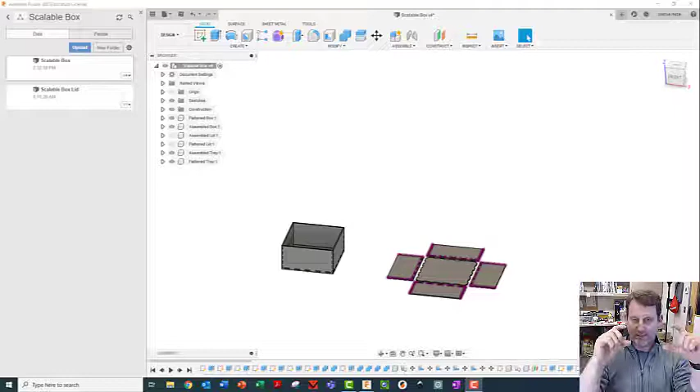We've already done some work. We figured out and made this measured drawing of the size of our tray and all the little compartments and what they're going to be used for. We've also looked at the depth of the box and the depth of the lid and figured out how deep we can make our tray.

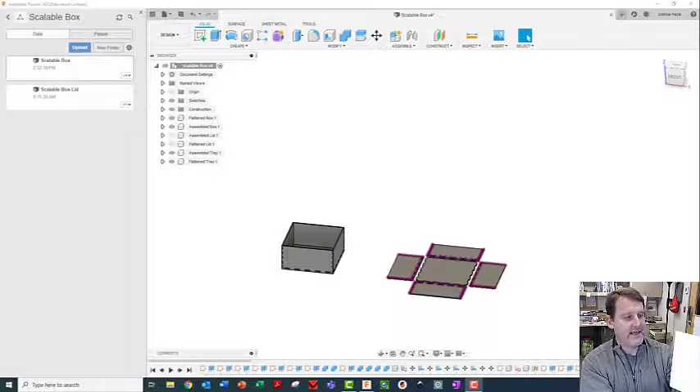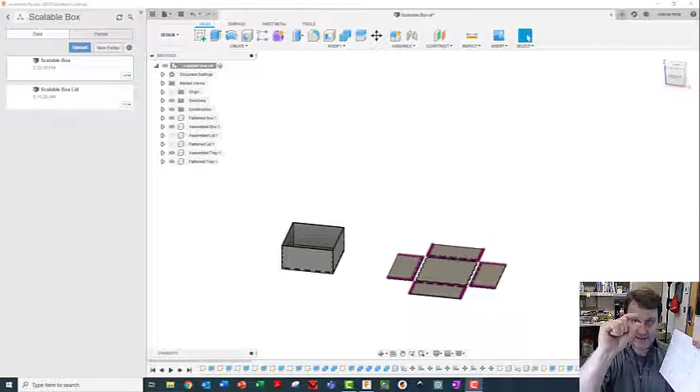One of the things you have to be careful about when making the tray is that the smaller the compartments get, the more shallow the tray needs to be. If you've got something only a few centimeters wide in both directions and you make it 5 centimeters deep, you won't be able to get your fingers down to the bottom to grab anything, and you'll be very frustrated by that tray. So as your boxes get smaller, the wall of the tray has to get less deep, so you're still able to grab stuff at the bottom.

All right, so here we go, let's do it. I'm going to open up my Fusion 360 and open up the scalable box file. You can see I have it open here, and what I'm going to do is build the tray in this file.

You don't have to do it this way. The reason I'm doing this is that I think it's kind of fun to have them all in one place, and I can reuse my parameters from before for scaling things later. But you can start with a brand new file, you just have to add the parameters.

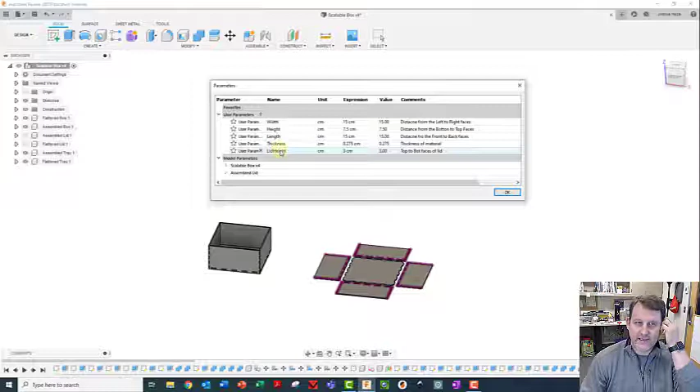So let's take a look at those real quick. Right now we have width, height, and length parameters, a thickness parameter, and I added this one for lid height. You're going to need this lid height parameter—mine was 3 centimeters, which is the height of the side walls of my lid.

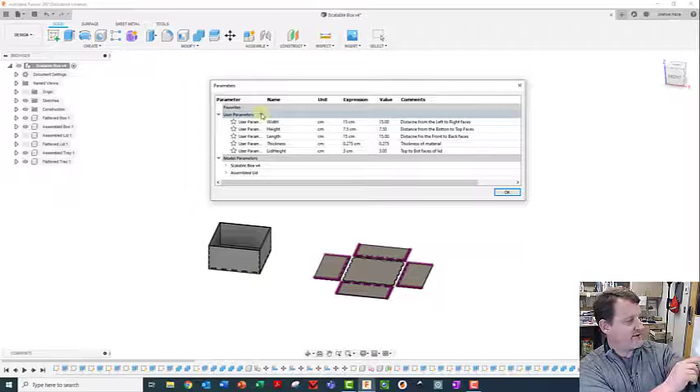From here, what I'm going to do is add some more parameters. We know that the width of our tray is going to be width minus 2 times the thickness minus 0.15 centimeters. Now, we can type that in every time, or we can make a new parameter.

Watch this—I'm going to call this one 'lid width'. I can't use spaces up here, so that's fine to leave it like that. This one's going to be just what I want: width—normal width, not lid width—minus 2 times the thickness, minus 0.15. So now I've defined lid width as a combination of width, thickness, and this number.

So if sometime later I want to change things around and make it wider or narrower, I can easily come and do that right here, and it'll ripple through everything.

So this is the left to right face of the lid, the distance from the left to right face. Maybe I'll put 'from' in here—so, from left to right face of the lid, and that's our width.

We'll do the same thing with length. So, new parameter, we're going to call this lid length. We're going to enter this one as length minus 2 times the thickness minus... nope, that's wrong, minus 0.15 centimeters. Notice it's done the math for me real quick—based on what I put in, it's going to make it 14.3.

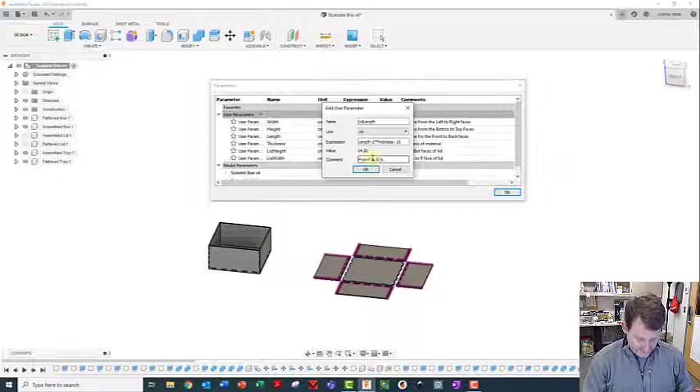And then this one is from front to back faces of the lid. Click OK.

And top to bottom, so the lid height was top to bottom of faces, left to right faces. Okay, these both match up, so I know for mine that they're correct. Yours will probably be different because you probably have a different length than a width. If you don't, if you're the same, then yours will be the same as well, but different numbers.

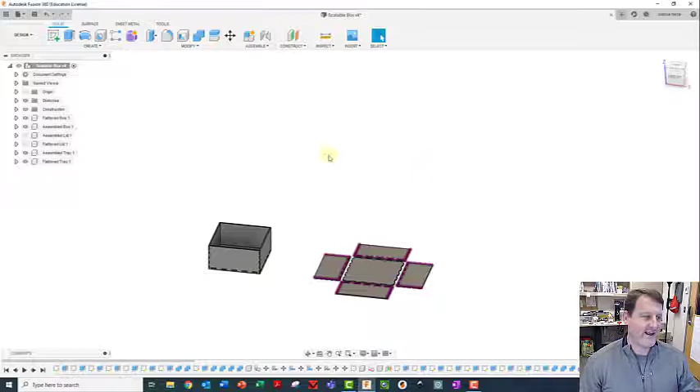All right, so that's it for our parameters. I think if we need more, we'll add more. So what I've done already, I went back and redesigned the lid, and added it to this file. I put the lid just above this one, and the flattened one just above that one. So that was kind of cool, I thought that'd be fun.

And I thought I'd maybe put the tray right in here. You don't need to put the lid in your file. In fact, you might be in a totally blank file, having just entered those things. If you do start with a blank file, here's what I want you to do though.

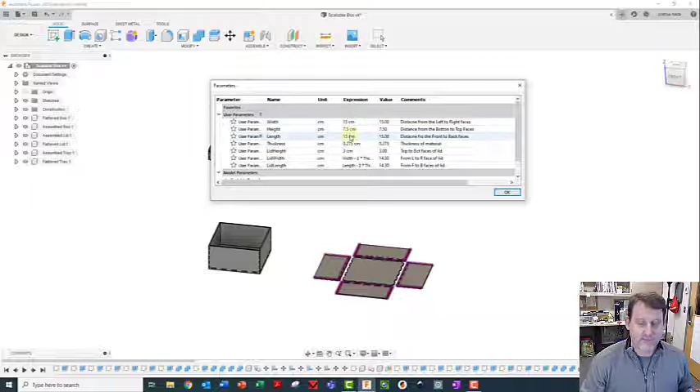I want you to create a width, height, length, and thickness parameter, and make it the width of your box, the height of your box, the length of your box, and then create these based on that number. That way when you come through here, you don't have to try and figure out how to fix things, you just make this the same 3 numbers that are in the box. And then it'll make a lid the right size, it'll ripple through there. Okay, so let me show you some stuff.

There's some confusing things going on here. I've made a whole bunch of components. Notice I've got an assembled box and a flattened box component. I've got an assembled lid and a flattened lid component. And I've got an assembled tray and flattened tray.

You don't have these two, you need to make these two. Don't worry about not having the lid ones. And even if you don't have both box ones, it doesn't matter. All you need to do is make sure you make these 2 components.

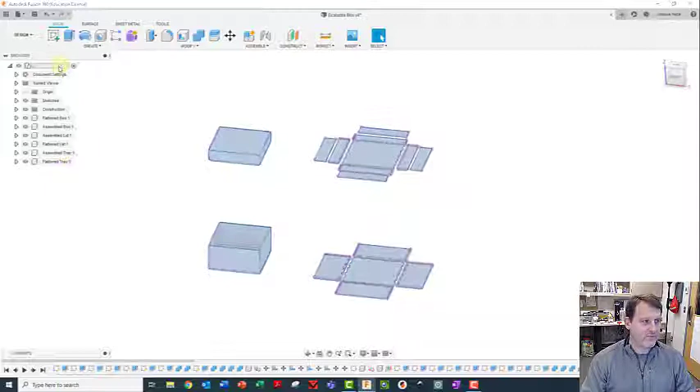So right click on scalable box, do new component, and call the first one assembled tray. Do it again, new component, and call it flattened tray.

Now notice how everything is like this dark gray color. That's because I have the top one, the scalable box, everything is the active component. That means everything can be messed with right now. Well, that's not always a good thing.

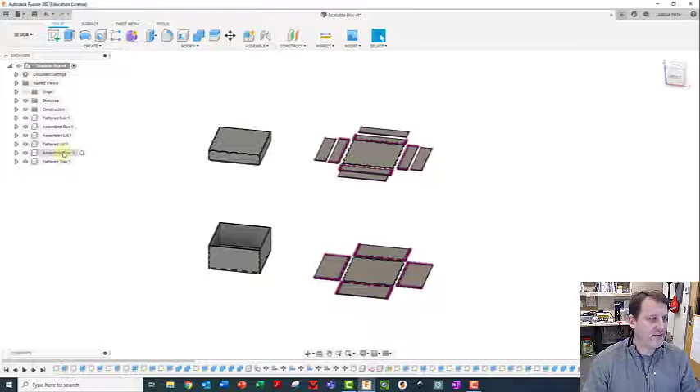In fact, when you have this on, all the sketches that you make are going to go into this main sketch folder. And I actually want my tray sketches to go into this assembled tray folder. So what I'm going to do is make assembled tray the active component. And when you do that, anything that's not active, which is everything else, is going to turn to this clear color so you know which ones are active and which ones aren't.

Right now, if I were to do something, it would not affect these other pieces. I can't edit them right now. I have to turn them on, or I can come up here and turn them all on and then affect all of them. Okay, go back to, I'm going to make assembled tray the active component, and I'm going to build the tray right here in between these two.

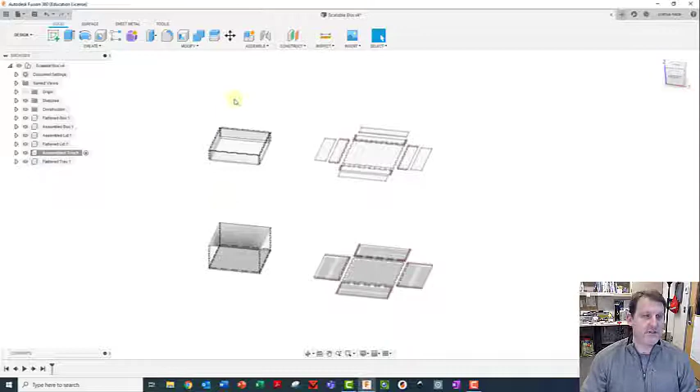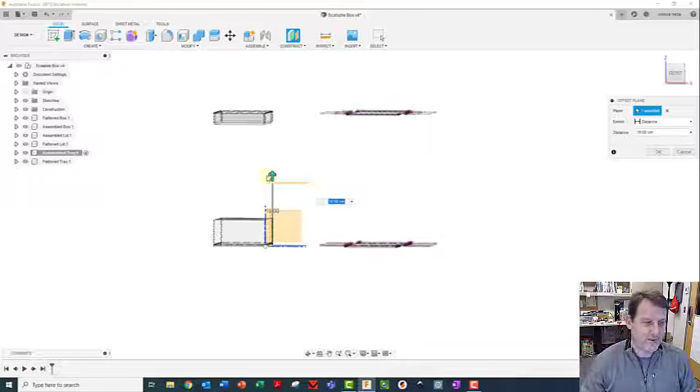So first thing I'm going to do is create a construction plane, offset plane. I'm going to offset it from this bottom plane here, and pull it up somewhere in between the lid and the box. And I'm going to build the tray from the bottom of the tray up, so I'm going to keep it a little bit probably lower towards the box. Yeah, about right there looks good. And I'm going to click OK.

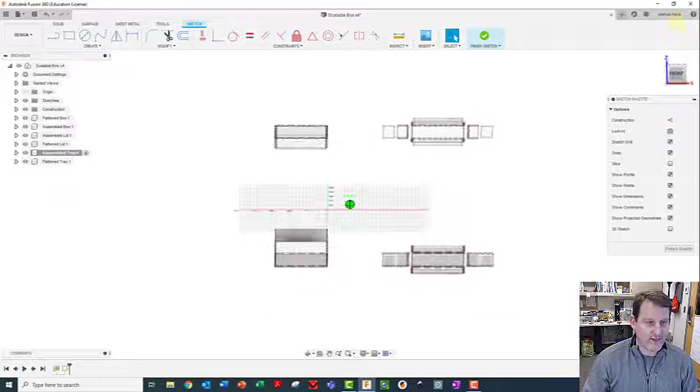Now I've got a plane to draw my tray on. So I'm going to come up here and click Create Sketch. I'm going to go right on that, and there's my sketch. Now, as you can tell, my sketch is actually below the top, it's down there, so I'm having to look through the lid.

I want to turn that lid off. So I'm going to come over here and do lid, turn the lids off. You probably don't even have that problem.

I am going to leave the box on, but I'm going to get the flattened box out because I don't want to be distracted by that. I want to leave the box on so I make sure I make it in the right quadrant. I'm going to make my tray over on this side somewhere. Okay, now what I'm going to do is just make a box.

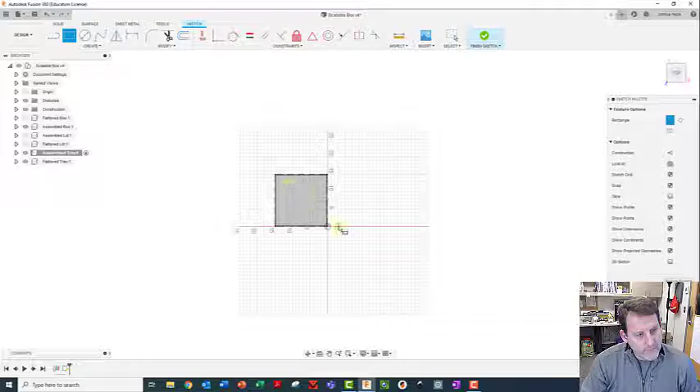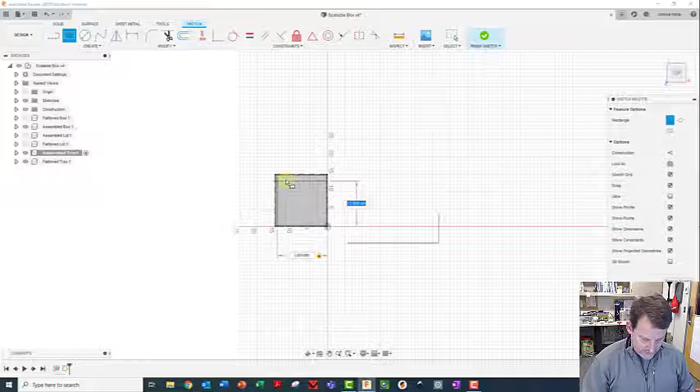I'm going to start on the quadrant. I paused for a second to think about where I wanted to make it. I'm going to make this the lid - the front is down on this face, so this direction is width and this direction is length for me. I'll call this lid width, enter, and the other one will be lid length - I can use the arrow key to go down or just keep typing until it gets to the right one. Then I'll hit enter, and that's the dimensions of my lid. Now that I've put it in the right place, I don't have to worry about that box anymore.

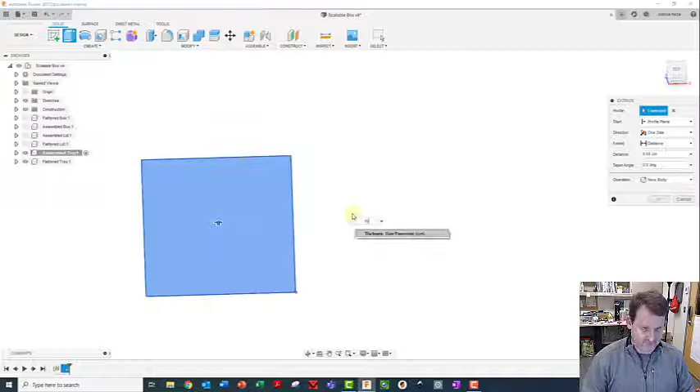So I'm going to hide the box and extrude this. I don't care which way it extrudes - thickness, I'm cool with that. Then I'll hit enter, and now I have the bottom of my box. That should be, if I've done everything correctly, in the bodies folder under assembled tray. And it is, so I'm going to call this the bottom tray. That's the bottom of the tray.

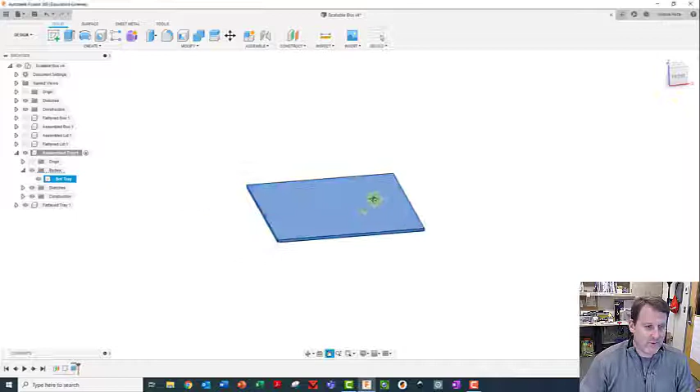Okay, now I'm ready to rock and roll. I'm going to start building all my walls, starting with my main wall going across from left to right. That's the way I want mine to be - you could do yours front to back, I'm going to do mine left to right. It doesn't matter, your choice. But I'm going to do the main wall first, which is halfway between these two walls.

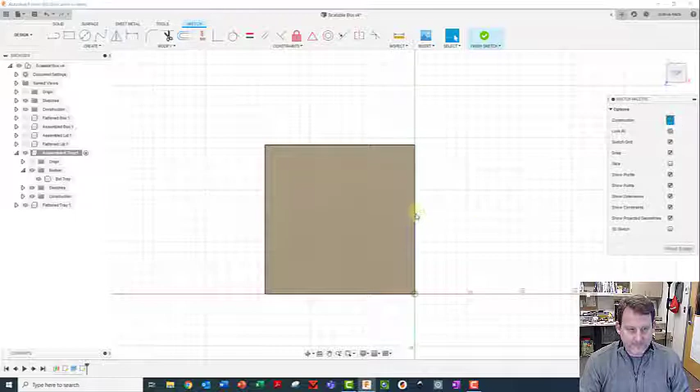So I'm going to come up here and get a construction line - construction, and then the line tool. I'm going to find the halfway point. Whoop, there it was - right there. I'm going to draw a construction line across. Awesome, that one's fixed in place. Then I'm going to draw another construction line down. I want to find the dead center of this, because what I want is for the wall of this box to be right on the middle.

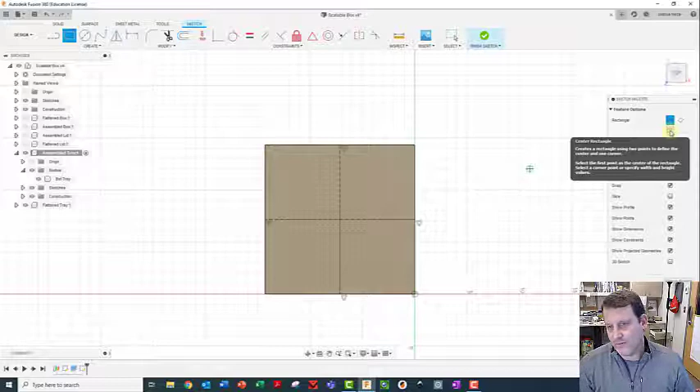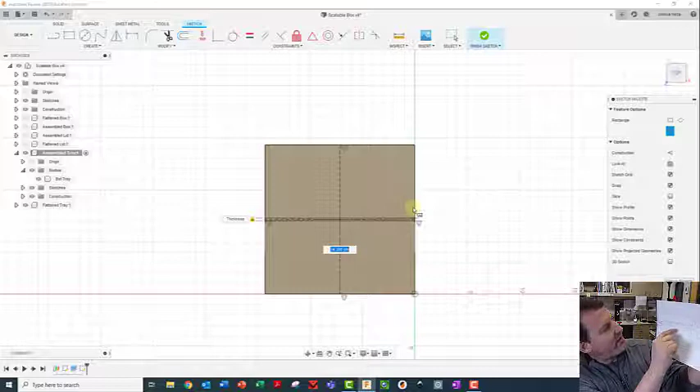So the next thing I'm going to do is grab a center rectangle, which is this one, and I'm going to center the rectangle right here in the middle of the box. Turn off the construction lines - I want an actual rectangle this time. This one's going to be thickness, because it's the thickness of our material. And then this next one is going to be 3 centimeters for the depth of the tray, plus an additional 3 centimeters - I'm going to do that right now. Plus a full 3 centimeters for the handle, whatever you think your handle should be. I'm going to add those two together, and that's going to give me 6 centimeters.

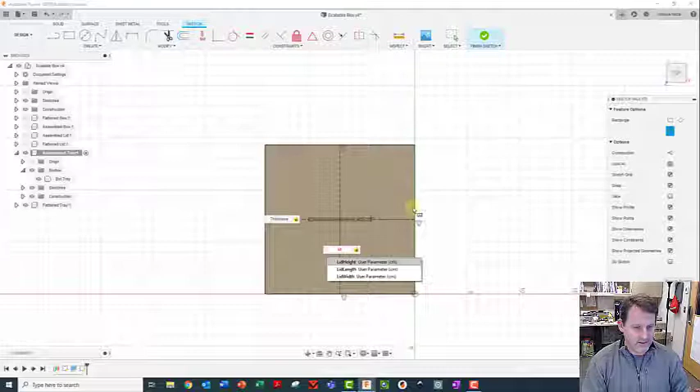No wait, how dumb am I - sorry, that should be the width of the box because mine's going left to right, so that should be the lid width. Wait, did I call that lid width this whole time? Yeah. Lid width - that should all... I'm so stupid, that should all be tray width. I'm not fixing that, I'll fix it next year. So that should say tray width, but it says lid width, so we're going to live with it. It's not the lid width, it's the width of the tray. My bad. And now I'm going to extrude this.

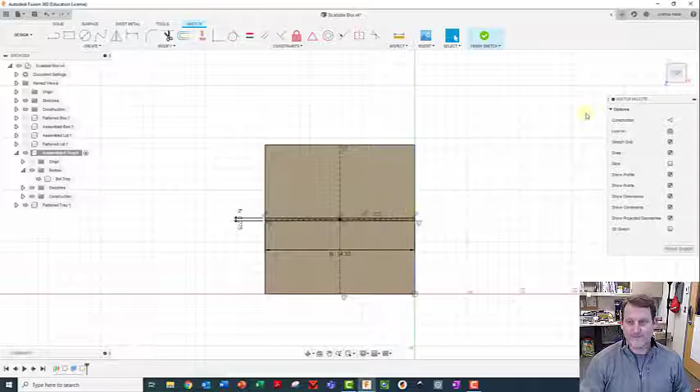And this is where that 6 centimeters comes in. This is the one thing that isn't going to change with your dimensions, because we're not dimensioning it off of anything else - we're giving it an actual number.

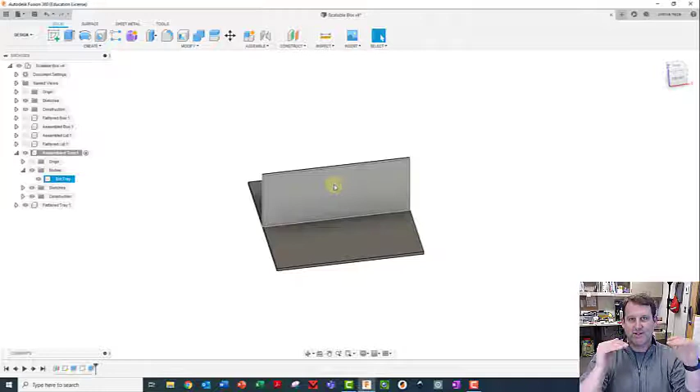So if we go back and change something, we're going to have to go back and redesign this centerpiece and change its height if we change the lid or the box depth or something. So that's our first piece down.

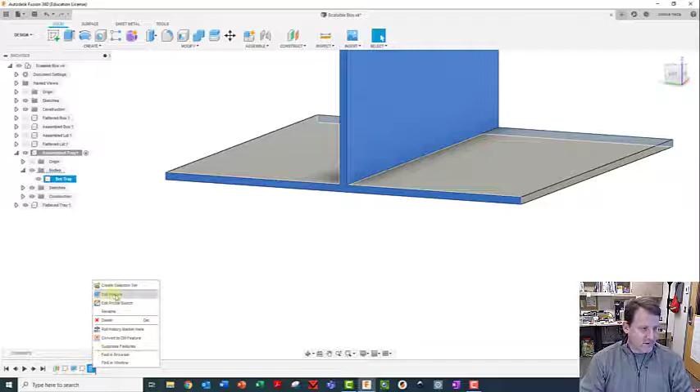Oh, nope, that was probably not right. Yeah, I just noticed, I didn't check. This should be a line here, but right now it's joined into one piece, so I need to go back and edit that feature. So that's my last extrude feature. I'm going to go back to edit feature, bring this back up, and just say new body here. Now notice how there's a line there, that means there's 2 separate bodies now.

So body 2, this is going to be the handle. Or maybe you want to call it middle tray or something like that. I don't know, all right.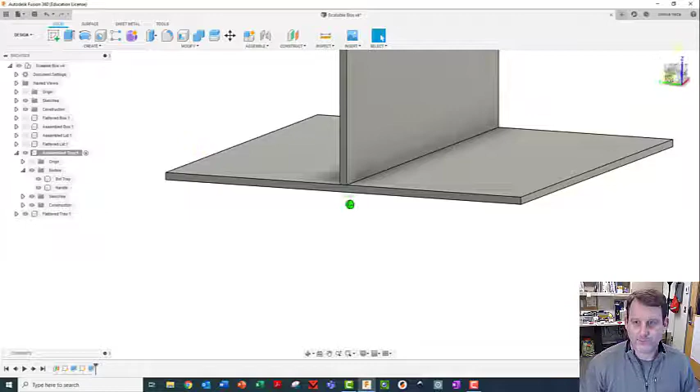Next, I'm going to draw the outside 4 rectangle, or 4 walls. I'm going to do it kind of the same way we did the box. I'm going to hide the handle first, create a sketch on the surface of this, and just do a rectangle.

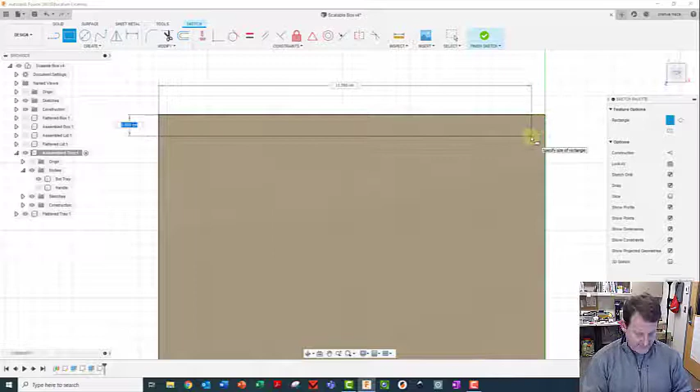I'm just going to think about what each side needs to be. So obviously this side is thickness tab. This side is width, nope, this side is lid width. There it is, yep, it fits perfectly. And I just want to make sure actually... yep, there's the front, so this is the width. And tab, this one should have been thickness. It didn't take for some reason.

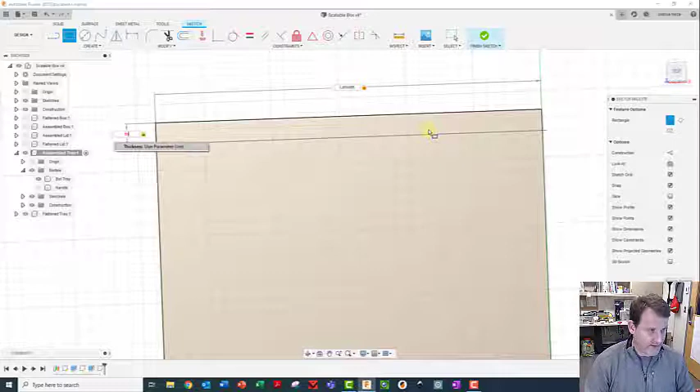And then enter, and I'm going to extrude this. Now this one's not going to be the same depth as the other one, or same thickness or height. It's going to just be 3 centimeters.

And I did it again, notice how there's not a line here. So I've got to go back and edit the feature. At some point I will learn to make sure this says new body, because it won't say it ever. I'm going to click OK. Now I have a 3 centimeter high wall here.

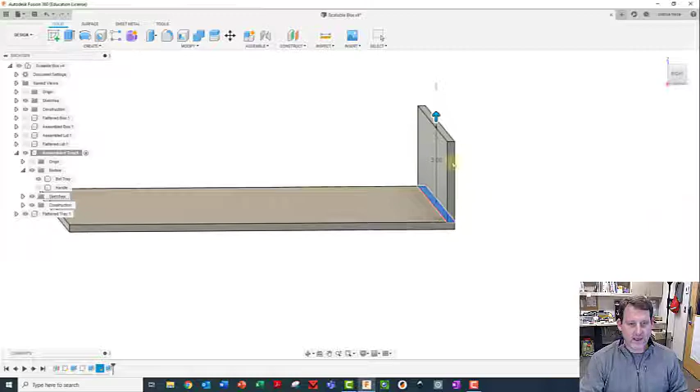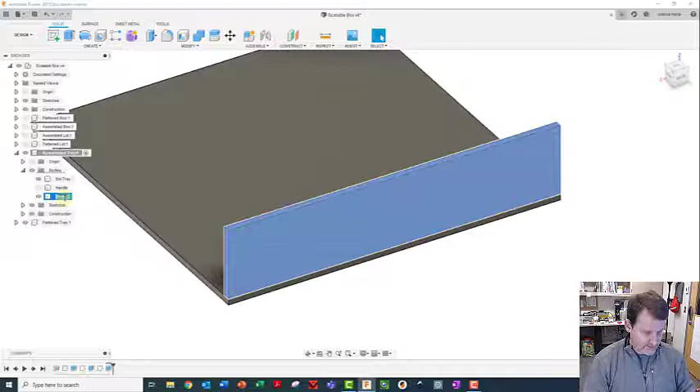And body 3, this should be... is this the front? No, this is the back. So I made the back wall first. So body 3 is back tray.

And next, I'm just going to click on another one and do another one. Yep, I'm in the right place. Oops. And now I'm going to create a wall down here. This is going to be the front. And just keep going around all the sides, adding in the walls.

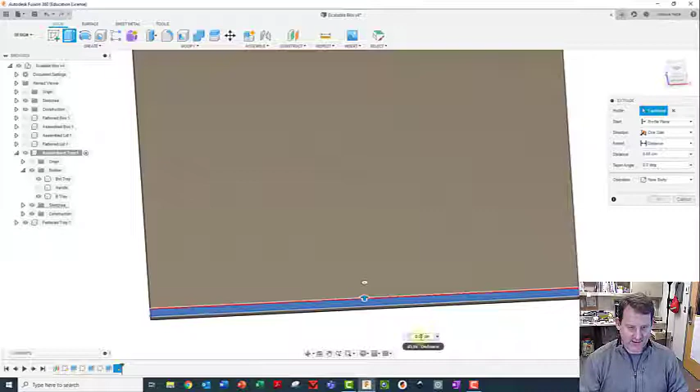So this is width, oh nope, lid width. Should be tray width, but I'm stupid, so it's lid width instead. Enter, and then extrude this, and make sure which direction it's going. Yep, that's right, I'm going to do 3. Again, this number won't change if I change other stuff because I'm just putting a number in.

And oh, I did it again, so I'm going to go back and edit feature, and I'm going to say new body. Okay, and I'm going to call this one, yep, front tray. Now I'm going to do the right side.

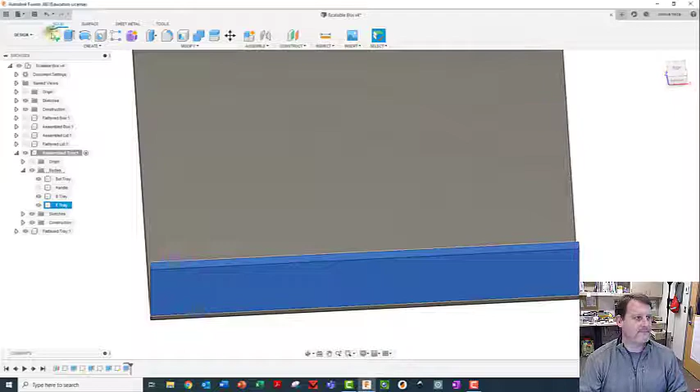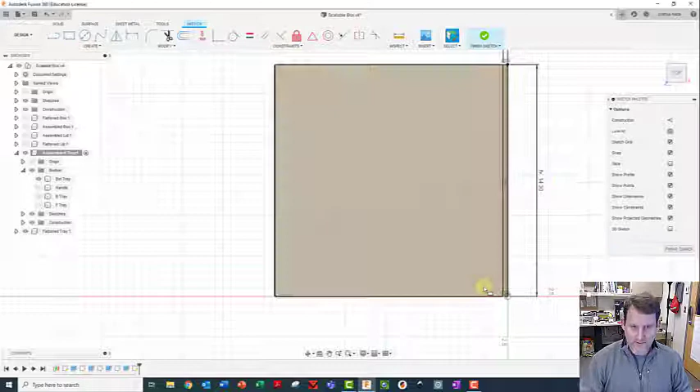So here, and this time I'm going to hide the back and the front of the tray, and draw a rectangle in this corner. And this is thickness, and this is lid length. Enter, extrude, and I'm going to go up 3 centimeters.

And I'm going to do new body, just make sure that's gone. Yep, everything's going great, okay. And then another one on the left side, but I'm going to make this one R tray.

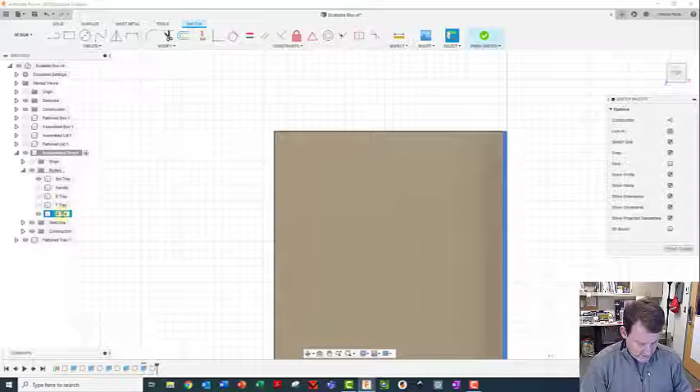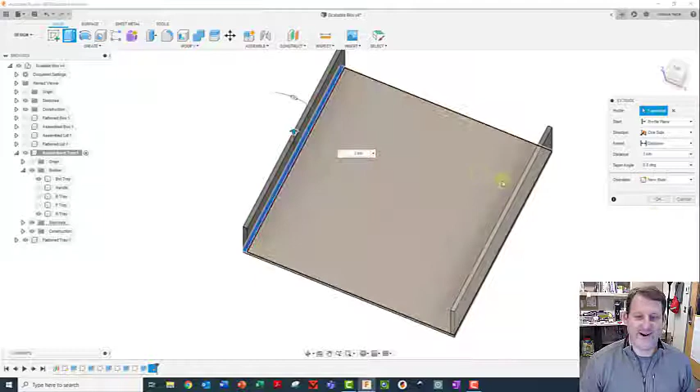And then a rectangle here. This one should be length, nope, this one should be lid length. And this one should be thickness. Enter, extrude, I'm going to pull this one up 3 centimeters. And I'm going to do, ooh look at me, I learned, new body. And I'm going to click OK. I'm going to call this left tray.

Okay, so now I've got the bottom, the handle, all of this built in. I need to now start building in my intermediate ones. Well, let's hold off there, and I'll show you how to do the rest in the next video, creating the inside ones.